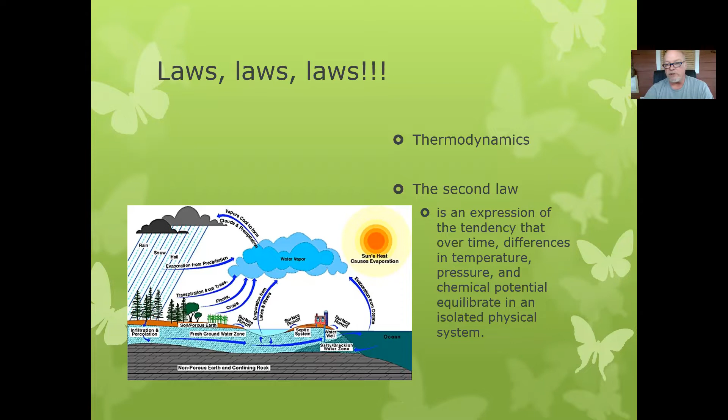The second law of thermodynamics basically says that everything in nature will equalize. All right, so meaning that everything will go around. We can't create energy. It is just transferred from one to another, and that's actually the first law of thermodynamics. But basically, the second law just says that everything in nature wants to equalize. Heat. Hot transfers to cold. Cold doesn't transfer to hot. Cold does not move by itself.

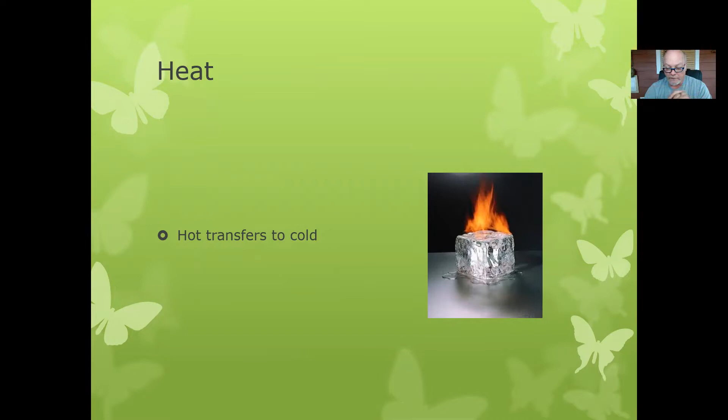It is heavier than hot air, but for the most part, when we're talking about thermodynamics, hot is the one that's going to be doing the movement. Pressure, high pressure obviously goes to low pressure. You know that when you blow up a balloon, it's going to equal out and try to be the same.

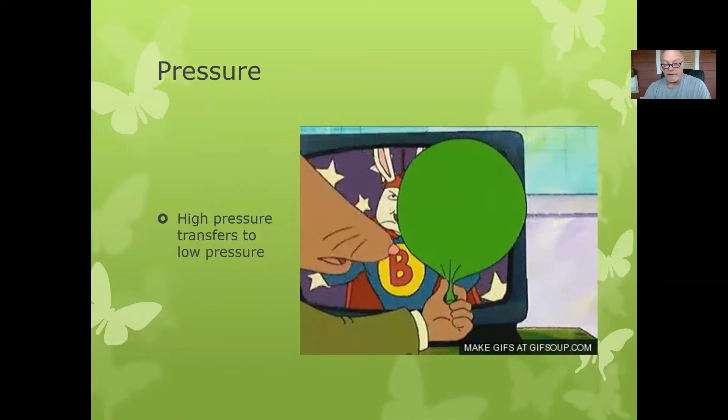So with that said, does hot air rise? Well, we've always been led to believe that hot air rises, but unfortunately, no. Cold air is more dense and heavier than hot air, and therefore it sinks because of gravity. And the hot air is displaced by the cold air sinking, so it's going to go up.

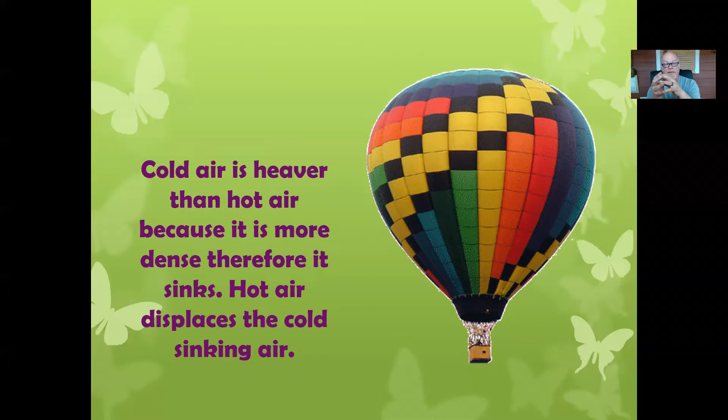So let's think about what's going on in space. We got a pocket of hot air, we got a pocket of cold air. What's going to happen? That hot air is going to overtake the cold air. Okay, keep that in mind. We're going to keep going now. So let's talk about thermal transfer. And so in that, we have to start thinking about, well, how does this heat move?

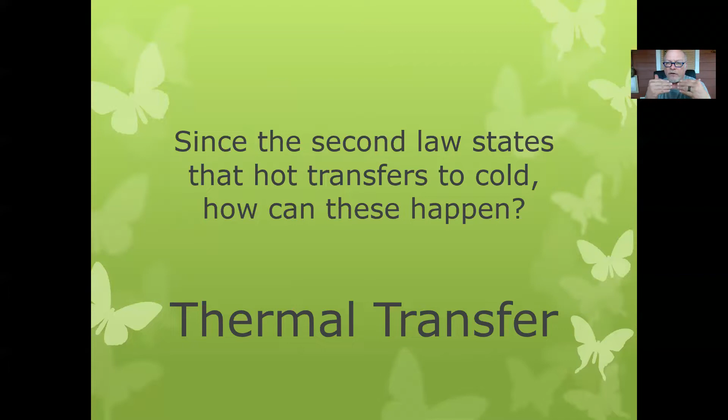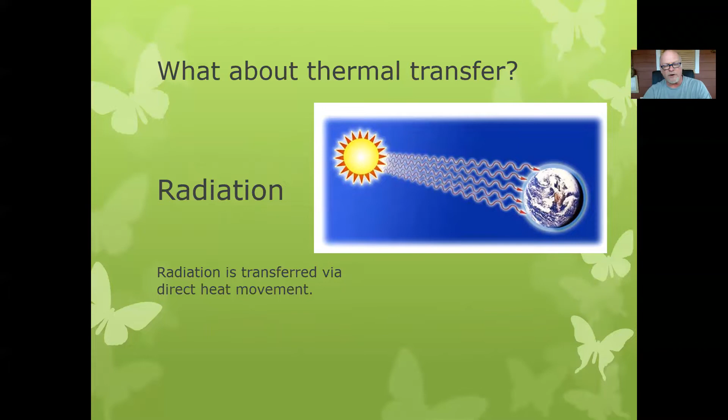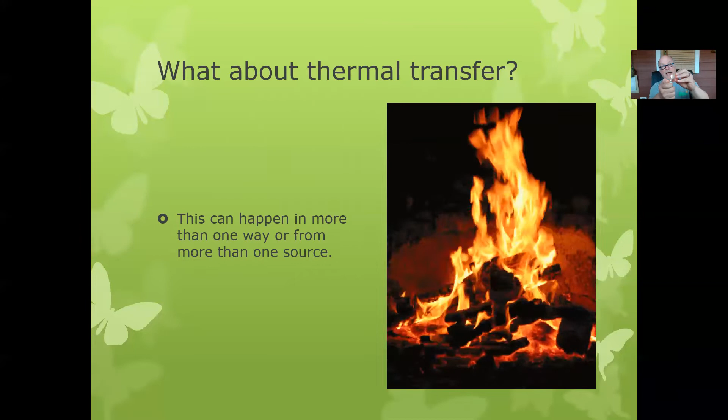So radiation is one of the movements of the heat transfer, and it's direct. So let's think about this. I take my lighter, and I can hold my hand up against it like this, and you can see it glowing. Well, I'm feeling nothing more than radiation. It is the heat that's coming off of this lighter directly straight to my hand.

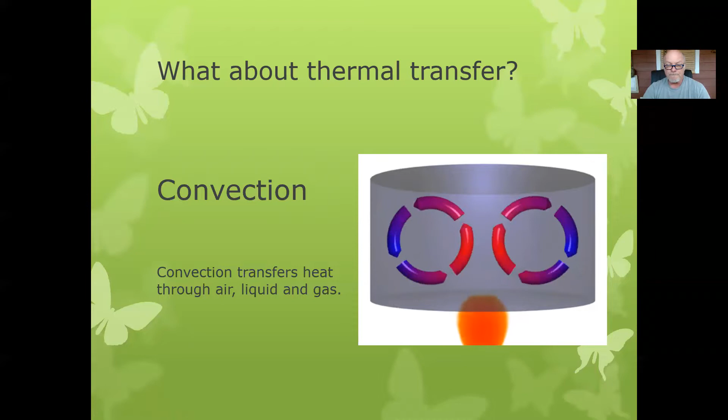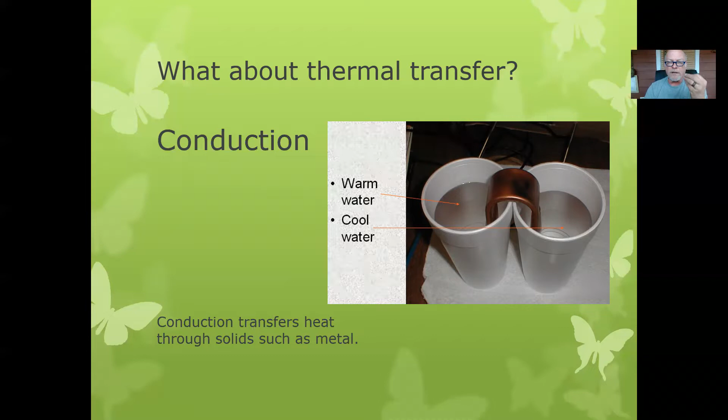So we have a school bus here, and I see people all the time. They're getting these school buses, they're not removing any windows, they're leaving this ceiling on, and they're not insulating anywhere in it at all. So what's going on here? Well, we got cold air that is going to try to sink in under this bus, and eventually it's going to infiltrate into the bus, through a phenomenon known as stack effect.

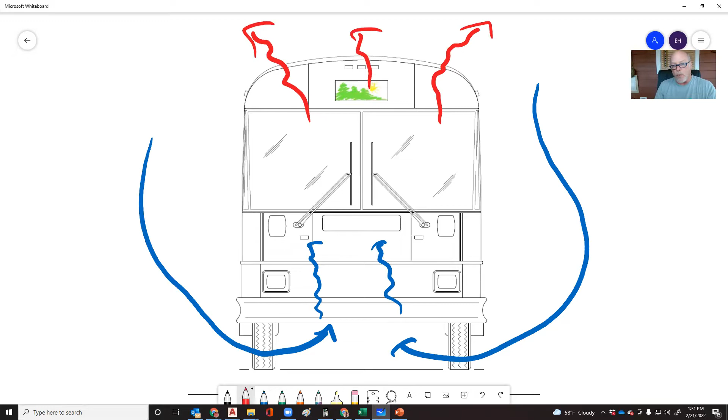And the hot energy is going to seep out through our ceiling, and this whole cycle is going to continue and continue, and you can't get the bus warm. So as you know, the whole bus is metal, and it's hard to keep it warm, especially when you got this old joker in here.

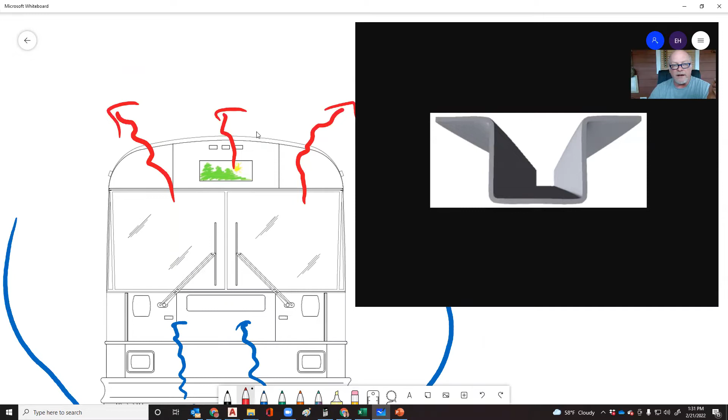So all of these ribs that are in the bus are basically a hat channel. I'm gonna have to do it with a different color. So this top here goes across this hat channel. It's just a skin, a very thin piece of metal that goes all the way around the bus, and it is bolted or riveted in to this hat channel here. Then on the bottom side, we have the inner wall or inner ceiling of our bus, and it is riveted or screwed into place.

Now in my bus, I have taken my ceiling down, so I no longer have a metal ceiling, and I have insulated all the area in between my ribs, and I have tried to insulate a little bit inside the ribs just by shooting Great Stuff or some other type of expansion foam through these holes here. Got to be careful because you want to make sure that all of this cures properly. So you can't just lay into it and go crazy with it. You got to take your time.

And generally what you have to do is bore a bigger hole than what's needed so you can get your tube from your spray foam up here and work your way down very slowly. Well, that don't always work, because the sun's going to come out and hit this metal surface here. And if it's any color other than white, or if you haven't polished it to a mirror finish, then you're going to be absorbing heat. Especially if it's black or any other kind of dark color, it's going to absorb heat more.

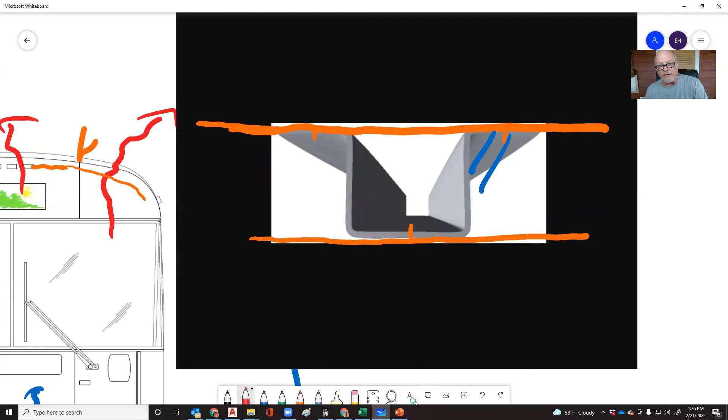However, when we put the screws in to hold our wood, then here we go again. That is going to transfer all the way down. How can you eliminate that? One thing that is possible, let me just back out of here and close this up a little bit. I have seen a couple of people do this, and it definitely makes sense, is that you tack a piece of wood onto the side of your hat track.

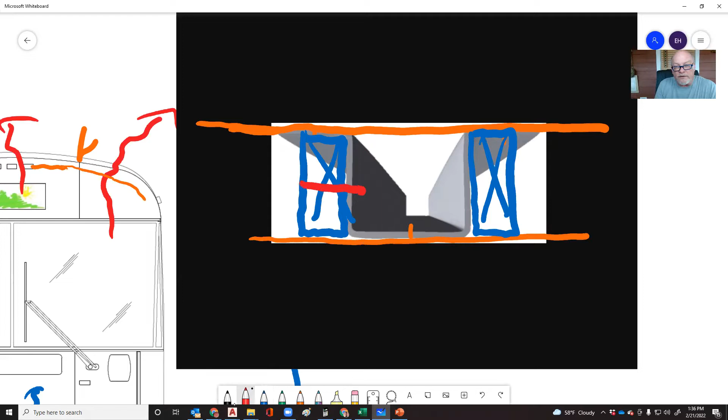And you have your fastener going into the side of it. And then you have your other fastener going down. This is wood or whatever. And then that way we stop this transfer at this point here. We don't have any more of the heat transfer that's going to come through that hat track there.

We could even do it better and put that rigid insulation back on there. And then when we put whatever wood we have in here, we're not going to have a problem, because the screws here are not directly tied to your hat track. Therefore, you're going to eliminate any and all thermal bridging here.

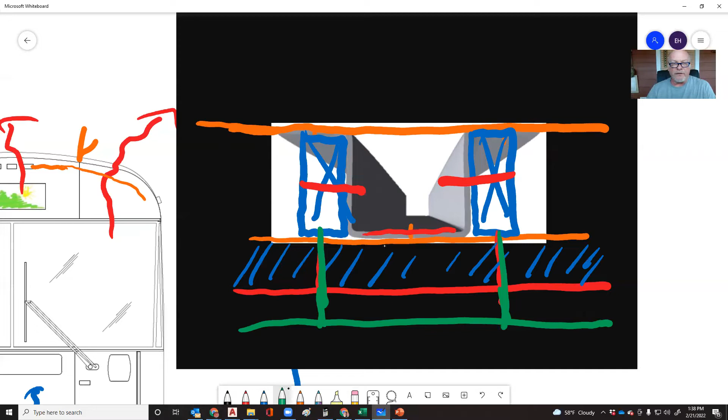And I don't know what is the best way to call it. Is it thermal bridging? Is it thermal bypass? So basically, we're building a bridge by putting this screw or this fastener in here, so we could call that a bridge for sure. Otherwise, if I fill this full of foam, then I'm thinking that it's bypassing all of that. So either way, a bridge or a bypass, we're having problems with it for sure. So it's super important that you make sure that you insulate your school buses all the way around everything. And let me explain to you what I mean by everything.

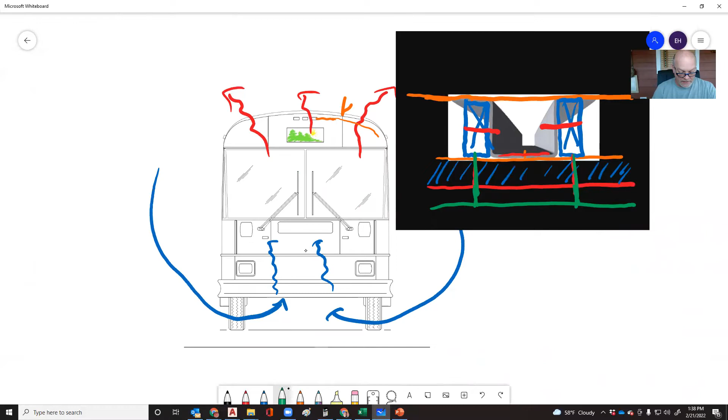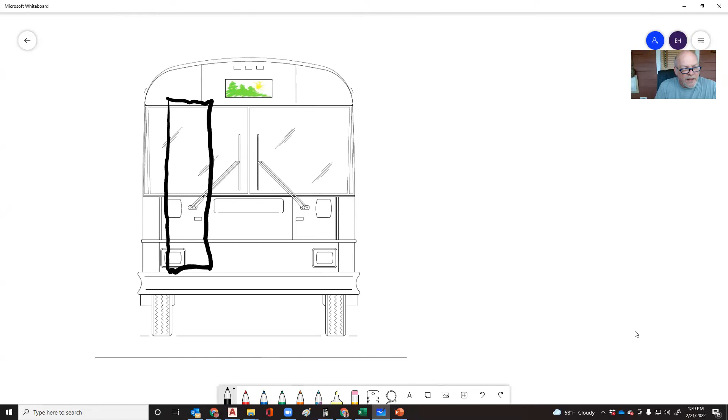I have decided that I want a gas refrigerator in here. So my gas refrigerator sits in here somewhere down the line there. And it has a pocket in here because there's a little bit of gas going out here. And this cools through what is called evaporative cooling. So as you know, if you put alcohol or anything on your skin, it feels really cold because it is evaporating super fast. And when you get evaporation, you have a cooling effect. So I know that sounds funny. We got gas here, we got a heat source, but it's making cold. But trust me, it works.

So on the side of this booger right here, I've got a little vent, because this fire has to have oxygen to breathe, and we don't want to take it from the inside of the bus. And since we do have gas, we want to make sure that this gas goes up and out through a little vent up here at the top. Well, because of this space in here, now I'm gonna look down on the bus. All right, so I'm gonna take this and I'm gonna look down on it.

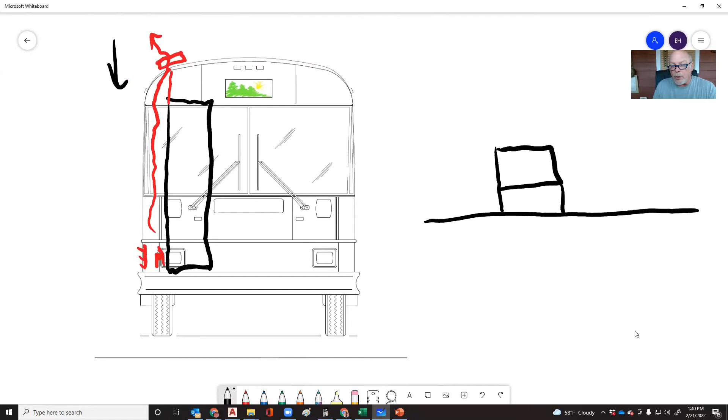All right, so here's the outside wall of the bus. Here is my refrigerator, and here's that space that I'm talking about. This space here is right here. So I insulated this whole wall down through here, but because I've got a big old opening here and a big old opening here and air traveling through it, then this is cold. So what I have to do is go back and add insulation in at this point here to eliminate any kind of heat loss or heat gain through these little spaces here.

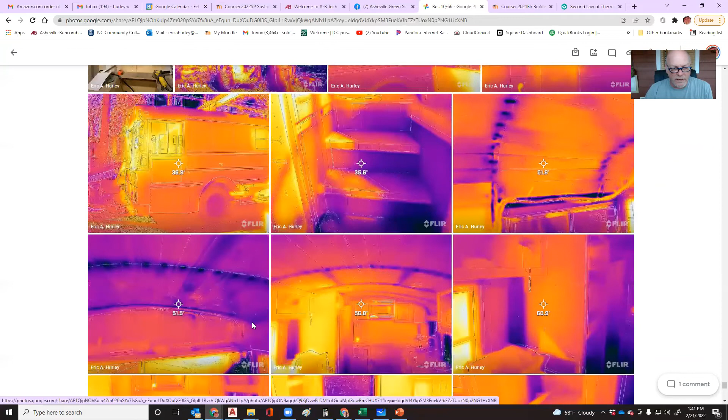Let me show you what that looks like. So I took my thermal imaging camera and I shot some places on my bus, and I wanted to share that with you. I've shared it in another post, but I just wanted to give some explanation on that. So let me go over here and find this. There it is. There is my refrigerator. You can see the front of the refrigerator here, and then there's that airspace.

All right, so I do have to take the refrigerator back out and hook up the gas line and test the gas line. But as I do take that out, I will insulate the sidewalls of this chase here, this gas chase, so that I don't have this great big blue space here.

And for you guys who don't understand what you're looking at, in this thermal imaging camera, we're looking at hot air through the orange here, or hotter air, and we're seeing colder air in here. Now, the middle of this is telling me what the temperature is right there. All right, so this temperature right here is 60.9. And so obviously this is going to be much colder over here.

So as we go through this, you can see where my ribs are. So like I say, I added sill seal in that. And if you don't know what sill seal is, let me show you a picture of it. So this is sill seal. You can get it at any supply house, construction supply house. It's just real thin foam that we usually put under the mud sill here so that we don't have any air coming in through into the house.

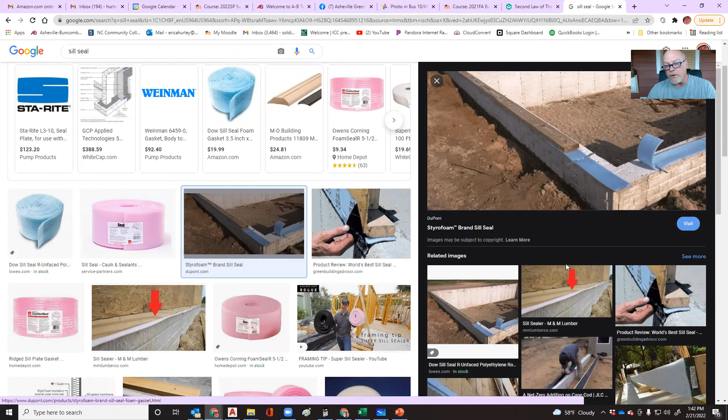And it works really well because this piece of wood and the foundation are not going to come together perfect, and you're going to have air gaps in here, much like what you see here. But we can caulk this. Caulk usually doesn't work too well on masonry to wood because of the expansion and contraction rates that differ on this.

So any kind of mineral material, such as concrete or rock, brick, they expand and contract with heat and cold. Whereas organic material, living material, or material that has lived, is going to expand with moisture. So if this gets wet, it's going to expand. If this gets dry, it's going to shrink. If this gets hot, it's going to expand. If it gets cold, it's going to shrink. So that gives you an idea of why we use this sill seal, just to stop it up in there. And so we have to use that in here to try to stop some of this bridging.

I went to the wrong one here. So you can see where the ribs are, and you can definitely see where the screws are in there as well. Like I say, I did put some foam here, not a great deal, but if you really want to stop this massively, then you're going to have to put maybe an inch, maybe a little bit more of foam between the ribs and whatever ceiling material you got. But of course, if you don't do something about your windows, then you're just going to continue to have problems.

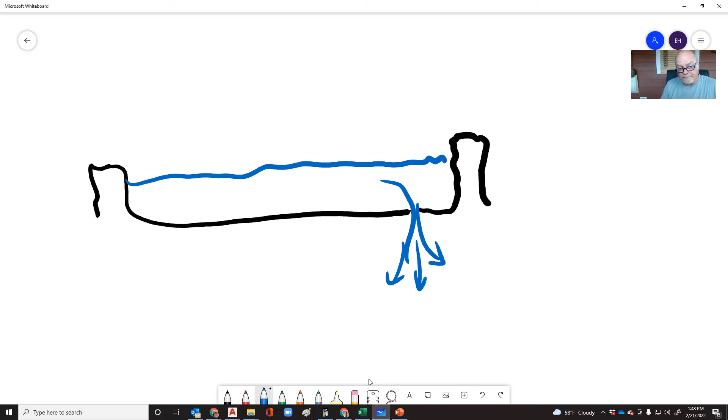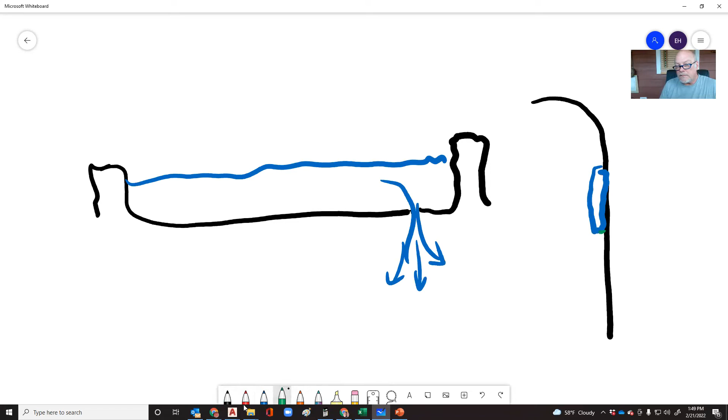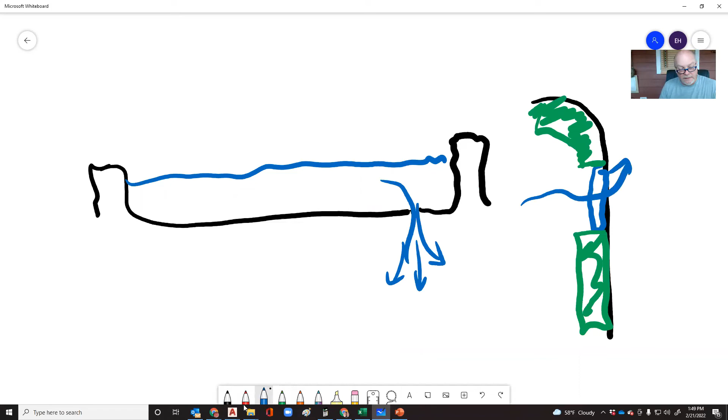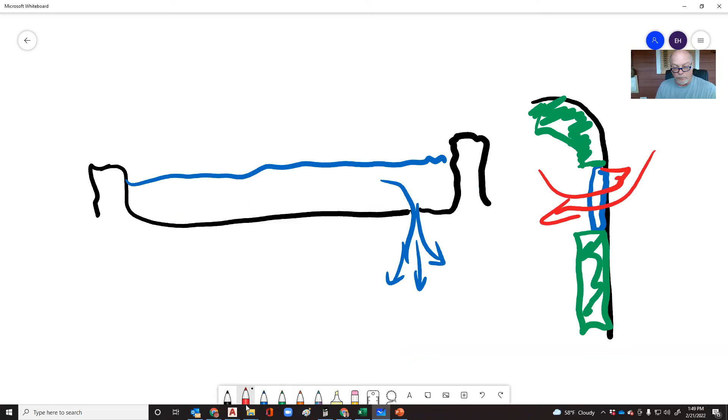Let's think about this. I have a bus that has those nice big windows in it. I can insulate all of this right here, all of that right there, and I've still got problems because I've got, let me change colors on that. I have either heat loss or I have heat gain. And this is a big old huge problem. And you can quote me on that, big old huge.

So let's look at this. A single pane of glass is not an insulator. If I had a flame on one side of it and I put my hand over here on the other side of it, then I'm definitely going to feel the effects of this heat, because once it hits there, this is direct radiation. It's going to hit this and become conduction, which is going to fly through there very, very quickly. And then, if I touch the window, I'm going to hurt myself. But otherwise, this is going to give off radiation, re-radiate, and I can feel it on this side.

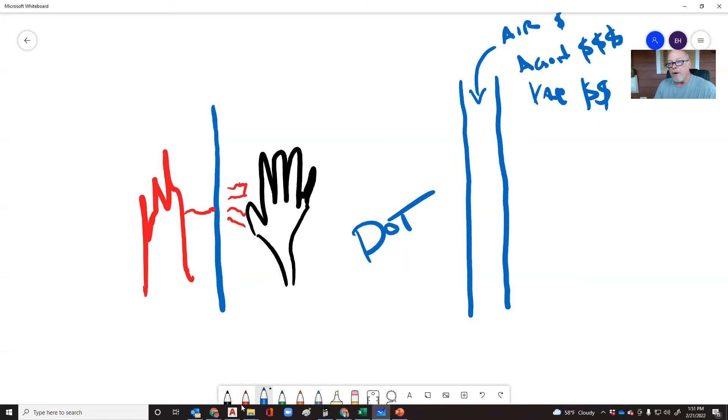Now, remember what I said about DOT? They require this glass all to be tempered. Well, that just shot that out of the window, because that's how much you're talking about now. So to do a proper bus, insulating it and doing something about the windows, the insulated glass is the only way to go.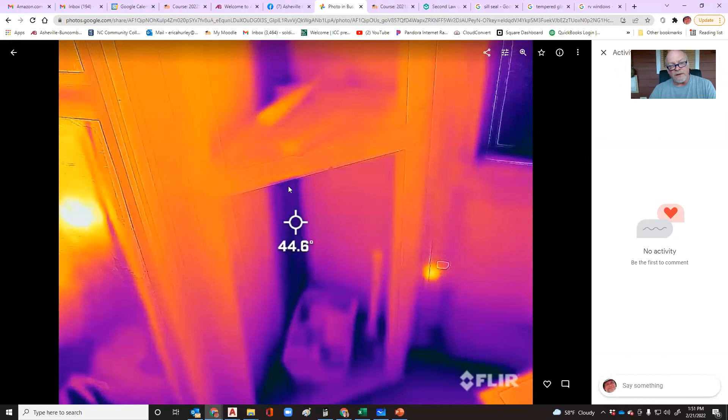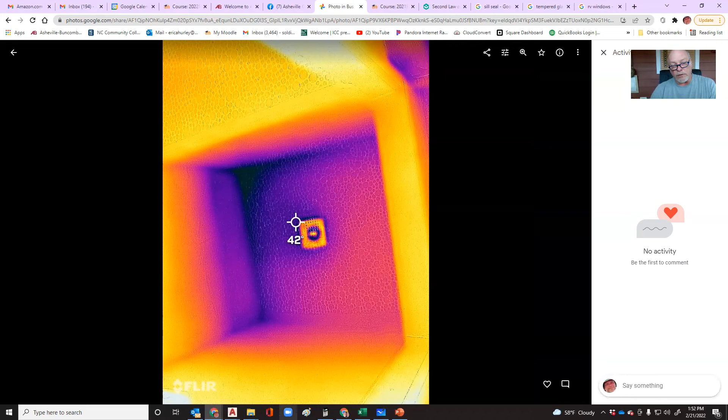So in this bus, again, there's other things that can transfer this heat. Number one, we have the ribs, which we've plenty talked about. You've got these hidden spaces where the back of the refrigerator is. I have that second metal door. And how do you insulate the door without removing the door? This is the shower. So this is just the deepest point in that. And this drain runs to a holding tank. So wait a minute. How is that getting cold?

So we're looking at our bus. And on my bus, I've got this shower. I'll show the little shower head up here. And there's a drain. And this drain runs down to a holding tank. Well, this holding tank is outside of the heated space in our bus. It's underneath it. So the outside temperature, in this case, was about 32 degrees. It's going to affect all the air and fluid that may be in here. There's no fluid in here at this point.

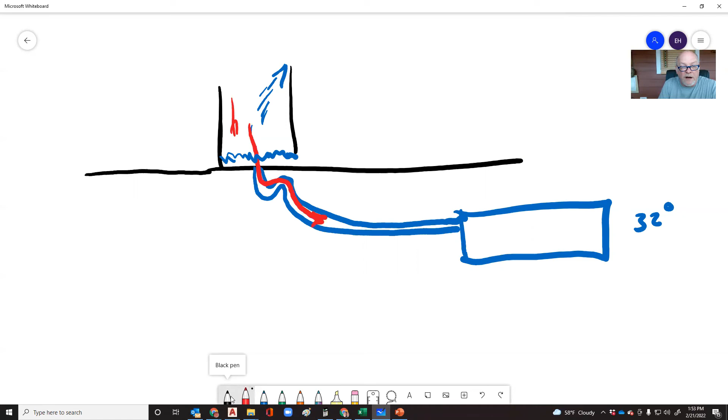But it's going to affect all the air in here, and it's going to be really, really cold. And the heat, I should say, moves to cold. All right. So it's going to build up all of this to a certain point in here. And that is where you're going to see the cold air in there. It's going to be the lowest thing in the entire bus, hugging the floor. But what it's doing all the time is stealing the hot energy that's coming in from the hot air.

This is the driver's seat, and down here we've got the pedals, the brake pedal and the gas pedal, and then right there, this is our enemy at this point, that big old shaft that's running down to the front tires. So let's go back and think about the way that looks. How does that work?

We have our front tire. We got our bus. Mine's a flat nose, so I'm just going to draw a flat nose. And I've got my seat in here, steering wheel, and then I've got this shaft that runs all the way down outside of the bus. Okay, so here's a floor. This runs metal to metal to metal all the way outside the bus.

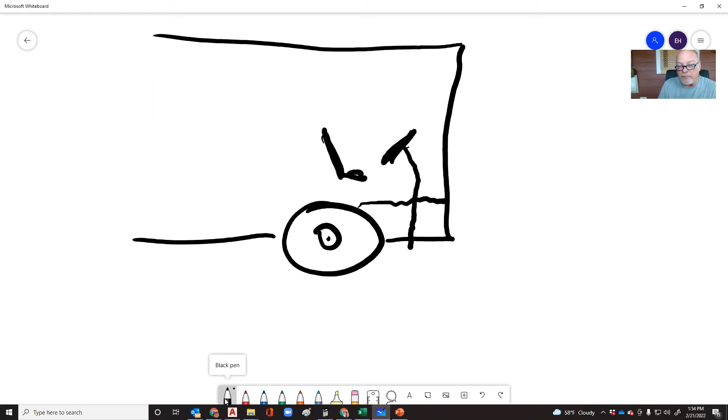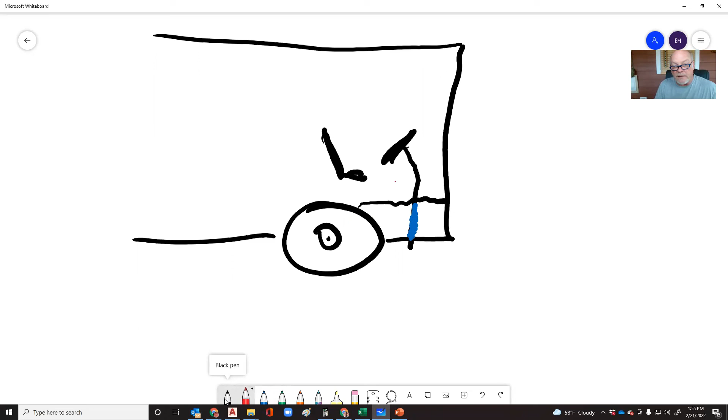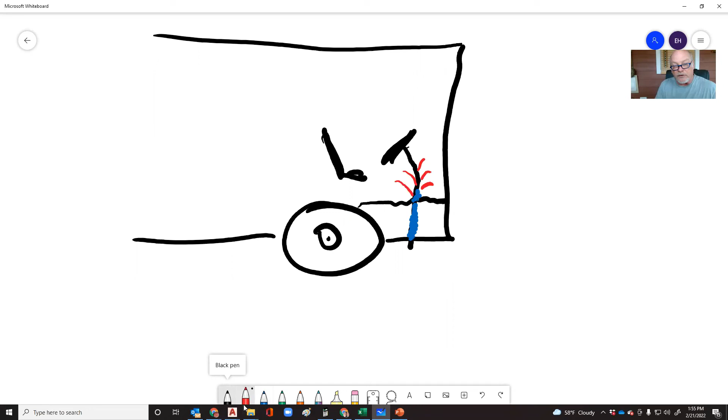Now, how do I separate this? I can't. Okay, I have to maintain metal to metal to metal. I can't just take this section out and put some plastic in here and expect it to work. It's just not going to happen. So what happens is this little booger gets cold, and heat is being stolen from inside on this thing. The heat's trying to keep this thing up, and the cold's kind of just winning because it's pulling that warmth out and shedding it to the outside. And that's why we have this cold area in here.

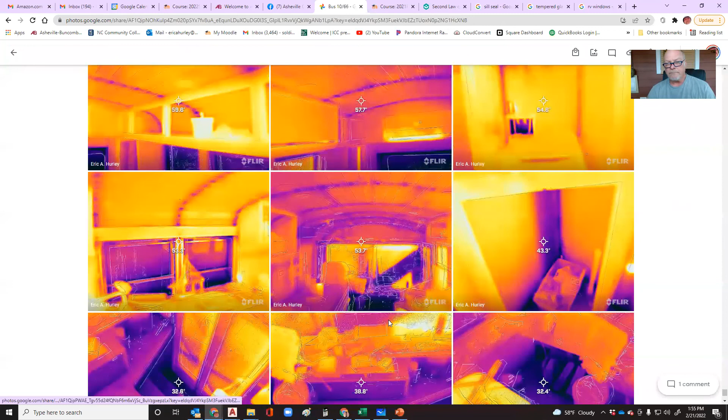The heater in the front has a fresh air vent that runs to the outside. So the same thing actually happens on it and can be a problematic thing. So in all, the only way that we can stop it completely and totally is we got to separate that outside skin of the bus and the floor. We got to isolate it from the interior of the bus so that we don't have heat loss or heat gain.

But we've got these windows in here that have stopped this insulation, this separation of inside and outside. So how are we going to fix that? One of the things that I plan on doing with our bus is I'm going to use window quilts. It's like drapes, big thick drapes is all it is. But I want to explain to you kind of what I'm talking about.

So let's say here's my rod, and I'm going to have my drapes hanging off of it, or like I say, a window quilt, which is thick, has lots of fluffy stuff in here, just like a batt insulation in your house. The fluff is the stuff. And on this, I'm going to sew a piece of Mylar insulation into this. Let me show you what that looks like. This is Mylar. It's a plastic sheet that is super reflective.

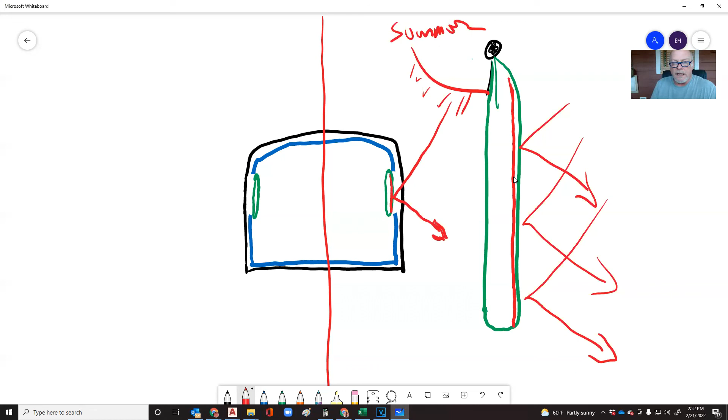In the wintertime months, we're going to take these curtains and turn them around so that the Mylar is to the inside. And we've got our fire in here, or whatever. We got our heat. I hope we don't have a fire in here, or it's contained in a stove anyway. And so this heat is going to be redirected back inside.

All the while we have all this nice fluffy insulation in here to prevent any conduction or convection from transferring any heat through there. It's going to hit that and it's going to stop. It's not going to continue on. So we're dealing with the radiation with the shiny Mylar. We're dealing with the convection and the conduction with our nice, fluffy, thick window blanket.